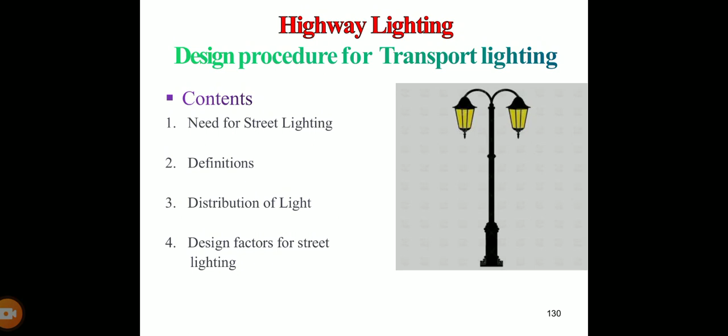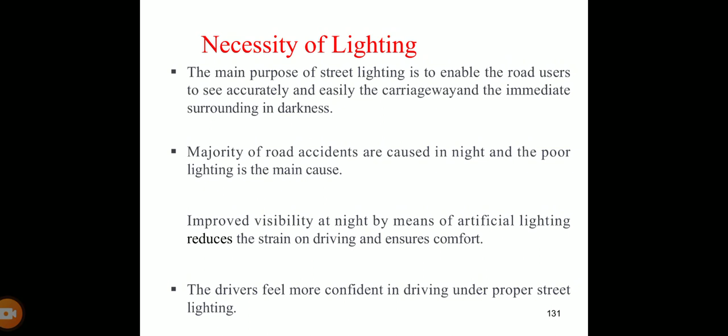Right? So, it is necessary to provide it at intersections, bridge sites, level crossings, and in places where restrictions to traffic movement are there. The driver feels more comfortable driving under proper street lighting. Improved visibility at night by means of artificial lighting should be provided in order to reduce the strain on driving and ensure comfort.

With better lighting, the speed of the traffic generally improves and traffic flow conditions also improve. Lighting on rural roads has not yet become common, evidently due to cost considerations and fewer pedestrians and other slow traffic using the facilities at night. But on the contrary, on urban roads where the density of population is very high, road lighting has other advantages like a feeling of security and protection.

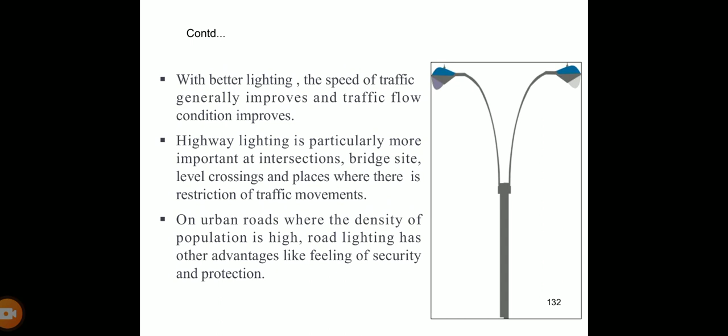Thus, even though headlights of vehicles may be sufficient for safe night driving, road lighting may still be considered as an additional facility for road users. This is a very important principle. Then there are several factors which influence night visibility. Among them is the amount and distribution of light flux from the lamps. It is going to vary, and ultimately it is going to hamper the lighting facility.

The size of the object, brightness of the object, brightness of the background, reflecting characteristics of the pavement surface, glare on the eye of the driver, and time available to see an object are some of the factors which will influence night visibility.

Then there are some terms that we'll study in detail. Luminous flux: this is the radiant power given by the light source. Its SI unit is lumen. Then what is lumen? It is indicated by lm. It is equal to the amount of flux received on a surface area of 1 square meter of a sphere when a light source of one candela power is placed at its center.

Means how much light it is going to give is nothing but a lumen. Lumen is the SI unit of luminous flux. Lumen is calculated by candle power into the angle at which it is going to throw the light. Steradian: a steradian is the unit of solid angle. It is equal to the solid angle subtended at the center of the sphere by unit area of its surface. You simply remember these terms.

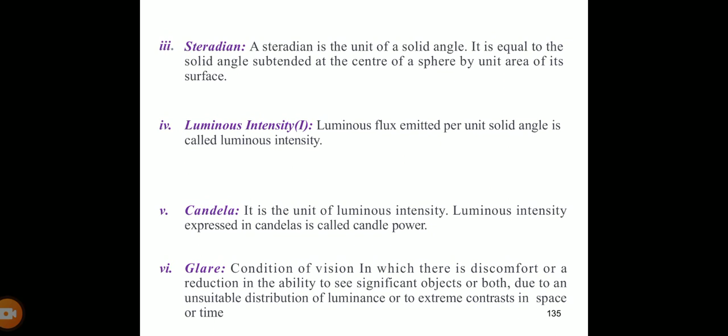Then luminous intensity: the luminous flux emitted per unit solid angle is called the luminous intensity. Then candela: it is the unit of luminous intensity. Luminous intensity expressed in candelas is called candle power. Glare: we have already learned this in detail, but we'll still simply overlook it. A condition of vision in which there is discomfort, or a reduction in the ability to see the significant object, or both, due to an unsuitable distribution of luminance or to extreme contrast in space or time, is called glare.

Then lantern: a housing for one or more lamps comprising a body and reflector, diffuser, or enclosure associated with the lamps is called a lantern. Then illumination: it is the measure of the amount of light flux which falls on the surface. We see the lights are on and off. How do we say on? If it is throwing light, then we say it is on. That is nothing but illumination.

So its formula is E equals Lm into Cu into LMF upon S into W. Its unit is lux or lumens per square meter. Now what do these terms indicate?

Here Lm is equal to lamp lumens, Cu is coefficient of utilization, Lmf is lamp maintenance factor, this is given in the IS codes. S is spacing between the luminaires and W is the width of the street or roadway in meters.

Now next important term we have luminance or brightness. The luminous intensity emitted or reflected per unit area of the surface is called luminance. Whatever is the intensity of the emitted light per unit area is called as luminance or brightness.

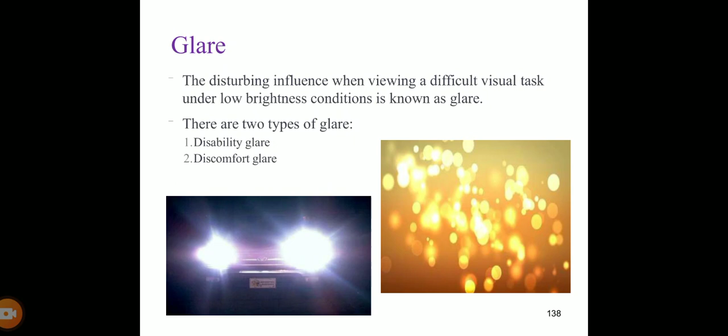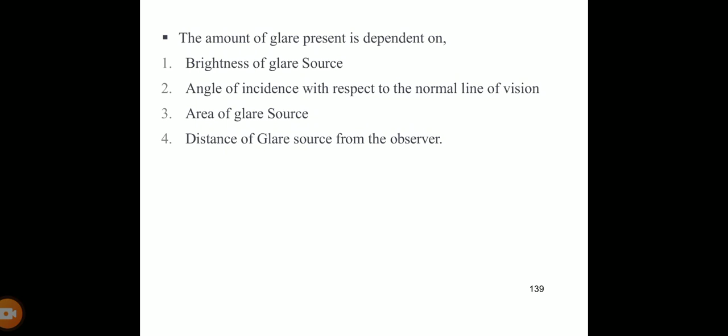The amount of glare present depends upon the brightness of the glare source, angle of incidence with respect to the normal line of vision, area of glare source, and distance of glare source from the observer.

Now lamps. In one or the other use, we have seen all these types of lamps, either used for household purposes or for commercial uses. The lamps commonly used for highway lighting are mercury vapor lamps, sodium vapor lamps, fluorescent lamps, and tungsten filament lamps.

Then luminary distribution of light. How exactly does the distribution of light take place? To have the best utility of the luminaire or the source of light, it is necessary to have proper distribution of light. It should be aimed to achieve the following purposes. It should cover the pavement between the kerbs, right? If you're going to lamp a light, whatever the curb area is, it should cover that.

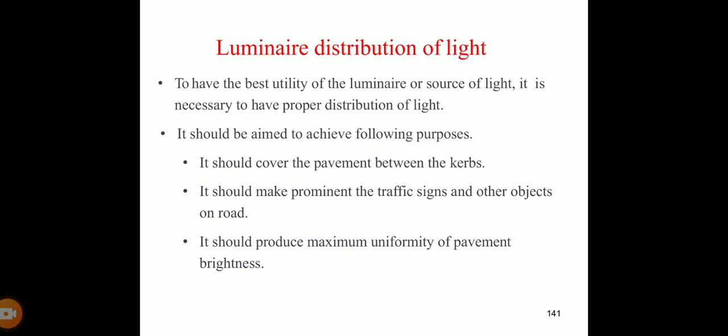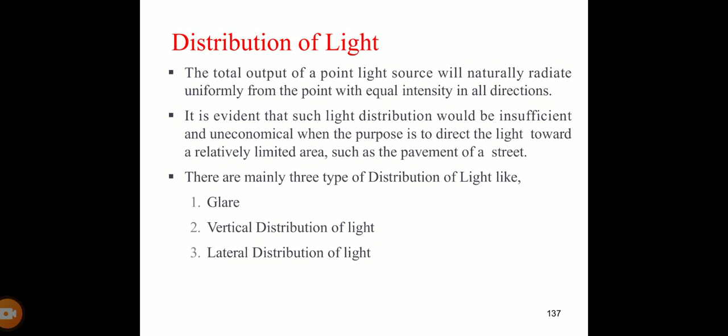It should make prominent the traffic signs and other objects on the road. Whatever light you focus should clearly show the traffic signals or signboards provided. It should produce maximum uniformity of the pavement brightness. As we said, distribution of light takes place in three ways, that is glare, vertical distribution and lateral distribution.

So next we have the horizontal distribution or horizontal aiming. When two floodlights are mounted to a single pole, then horizontal aiming also must be considered. Each floodlight should be vertically aimed according to the two-third rule. The floodlights should be aimed up to 90 degrees apart.

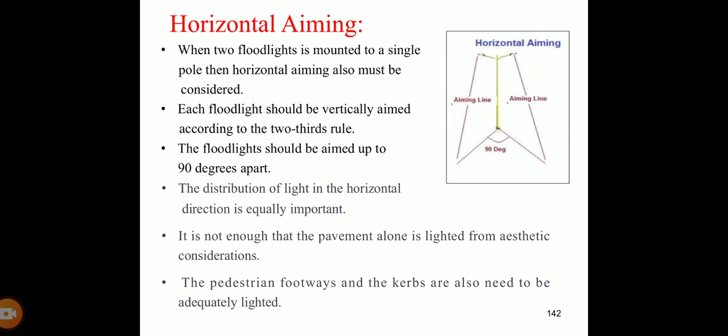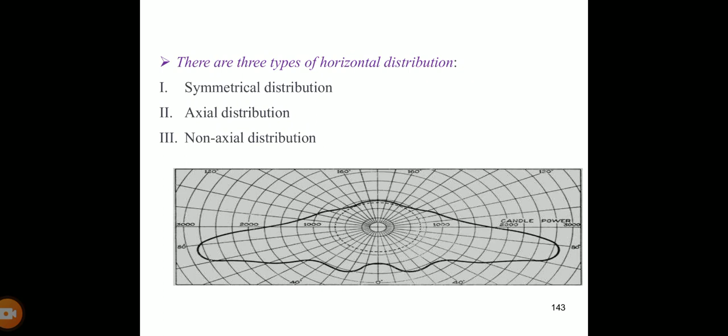The distribution of light in the horizontal direction is equally important. It is not enough that the pavement alone is lighted from aesthetic consideration. The pedestrian footpaths and the curbs also need to be adequately lighted. Again, this horizontal distribution can be further divided into symmetrical distribution, axial distribution, and non-axial distribution.

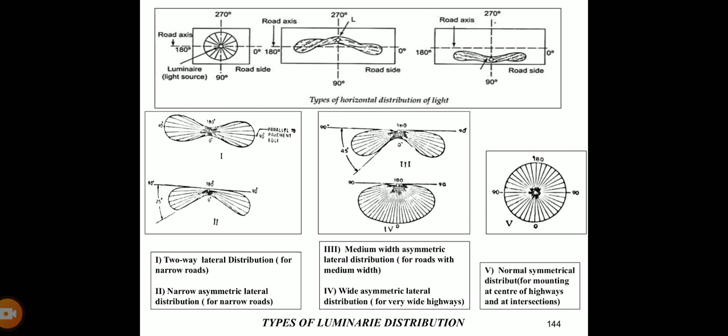So figure number 4 covers more area, whereas fifth, normal symmetrical distribution, is for mounting at the center of the highways and at intersections. See, generally at intersections we see that the entire circle is covered by these lights, hence this type of mounting should be done. Figure number 5. So depending upon the type of requirement of the light, this luminaire distribution is followed and the lamps are installed.

Now the third type is vertical aiming or vertical distribution of the lights. The vertical distribution of light in a street light system follows one of three types: cutoff. In the cutoff system, the light is reduced as completely and as rapidly as possible above about a 70-degree angle with the downward vertical. The main beam is usually provided at this angle. This system eliminates the glare. In vertical aiming, whatever the lamp will be, it will be focused at an angle of 70 degrees. Then it will cover a widespread area.

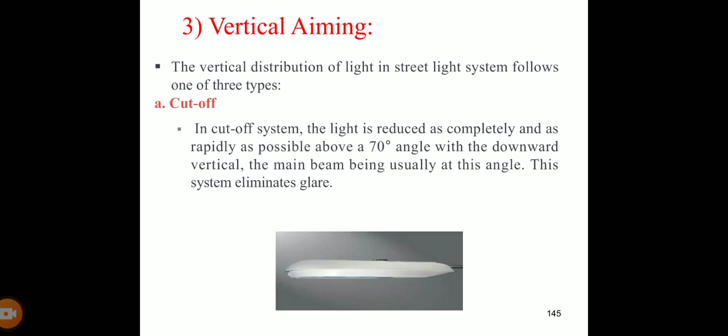The non-cutoff high angle beam. In the non-cutoff high angle beam system, the peak intensity is at about 80 degrees and there is considerable output near the horizontal plane. With this system, a certain amount of glare is inevitable and modern lighting practice does not favor this system. Hence, this system is not widely in use. And the third one, semi-cutoff, that is medium angle beam. This system is in between the above two systems, with a peak intensity directed at an angle of 75 degrees.

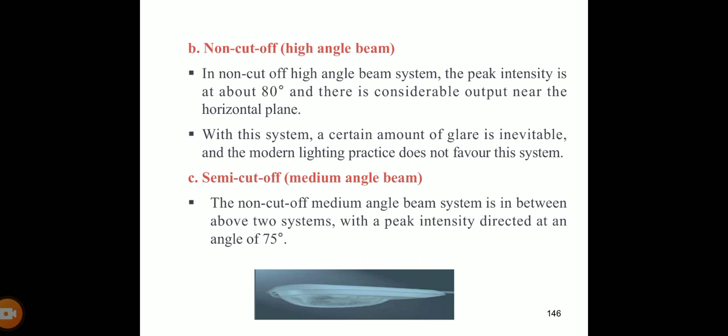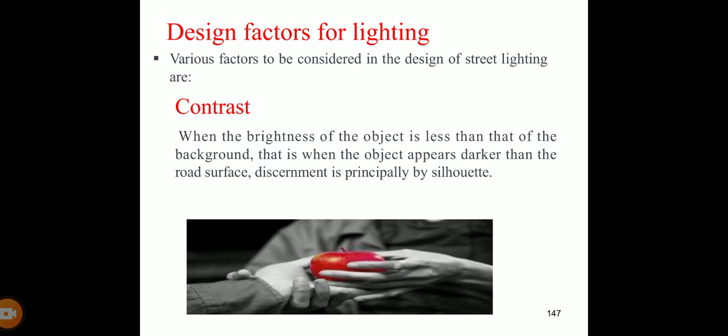Now there are some design factors for lighting, like contrast. When the brightness of the object is less than that of the background, the object appears darker than the road surface. Discernment is principally by silhouette. Height and overhang of mounting. The glare on the eyes from the mounted lights decreases with increasing height of the mounting. This is an important factor. The light will not directly affect your eye by increasing the height of the lighting. By increasing the height, the widespread area will also go on increasing. Usually mounting height ranges from 6 meters to 10 meters.

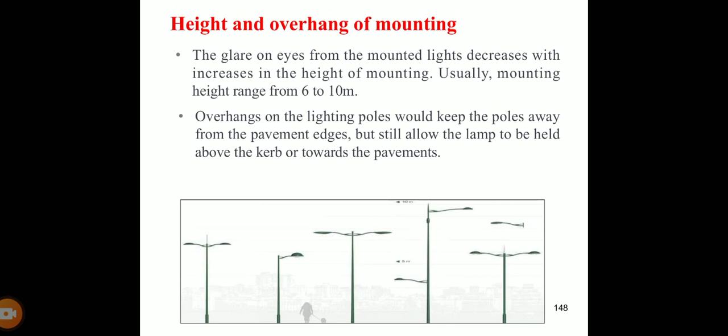Once you pass along the road in urban areas, you see various types of lighting provided along the streets. Overhangs on the lighting poles keep the poles away from the pavement edges but still allow the lamp to be held above the curb or towards the pavement. So here again some figures show various types of lighting facilities. The lighting pole should not be installed very close to the pavement edge because in that case the capacity of the roadway is affected and the free movement of traffic is obstructed. So there should be proper spacing provided between the lighting. We'll study it in detail.

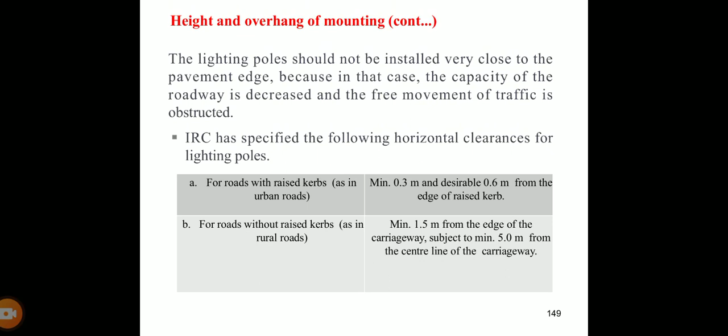As per IRC, the horizontal clearance for the lighting pole for roads with raised curbs should be minimum 0.3 meter to 0.6 meter from the edges of the raised curb. And for roads without raised curbs, that is, curbs are provided along the road itself, not raised by providing certain height or islands, the minimum is 1.5 meter from the edge of the carriageway, subject to 5 meter from the center line of the carriageway. These are the specifications by IRC.

Overhanging should also be avoided, and proper location of the lamp should be done in order to counteract the shadow problem. Now again, in vertical aiming, the fixture should be aimed to two-thirds of the distance across the area to be lighted, and at least a 30-degree angle should be provided below horizontal.

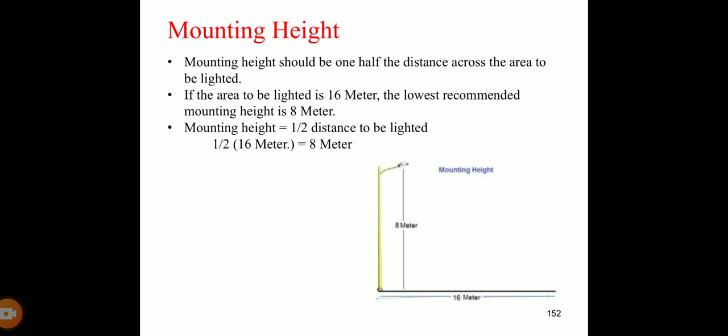Then mounting height. Mounting height should be one half the distance across the area to be lighted. If the area to be lighted is 16 meter, the lowest recommended mounting height is 8 meter. Mounting height is half the distance to be lighted. Whatever area you want to cover, the height should be simply half, or we can say height should be equal to half the distance to be lighted.

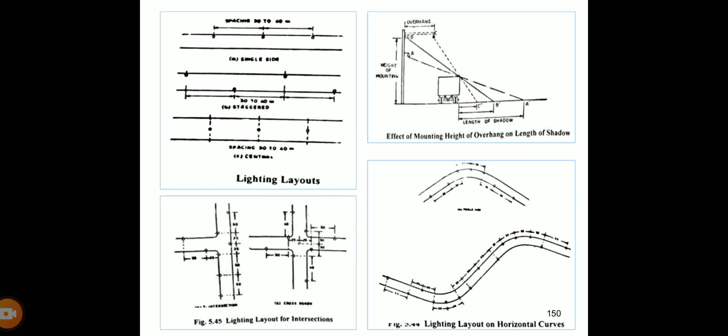Then spacing. The spacing between lamps on straight roads is about 3 to 5 times the mounting height. How much should it be? 3 to 5 times the height. For sharp curves, the spacing between the lamps will go on reducing, or they will be as close as possible for better visibility conditions. Okay, so this fourth figure is showing you the lighting facilities on the curve. Now see, the spacing between the lamps is decreasing, whereas for simply straight roads, the spacing should be around 3 to 5 times the mounting height.

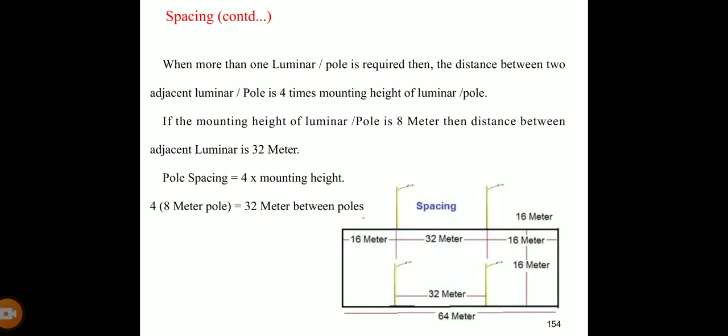When more than one luminaire per pole is required, then the distance between two adjacent luminaires is 4 times the mounting height of the luminaires. If the mounting height of the luminaire is 8 meter, then the distance between adjacent luminaires is 32 meter, 8 into 4. Then pole spacing should be 4 into mounting height.

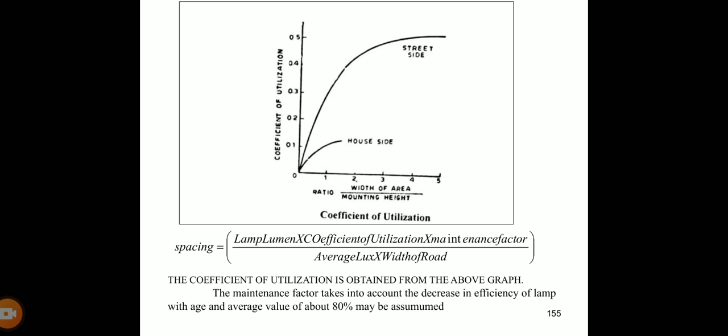Now this is the graph showing the spacing. Spacing is lamp lumen into coefficient of utilization into maintenance factor upon average lux into width of the road. Then what is the coefficient of utilization? It is obtained from the ratio of width of area upon mounting height, from this above figure. The maintenance factor takes into account the decrease in efficiency of the lamp with age. An average value of about 80% can be assumed.

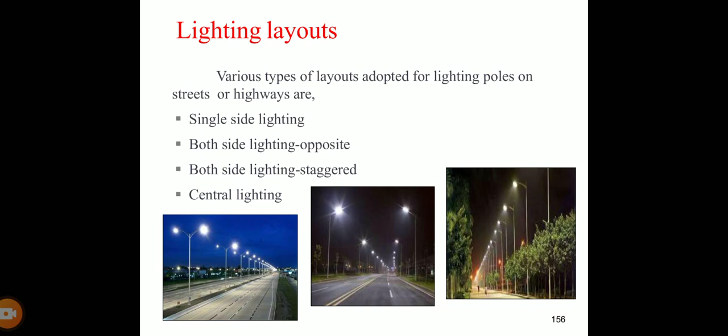Then lighting layout. When you move along the streets, you might have seen lighting facilities provided like this. These are the layouts adopted for lighting poles on streets or highways. This can be a single-sided lighting system, where only one-sided lighting is provided. See these figures. Whereas there is the both-side lamp system, figure number 1, both-side lighting staggered, and the central lighting system, again the first figure.

Then what are the benefits of this lighting? Due to proper street lighting, the police can patrol better during the night, and their job becomes easier and more manageable. Architects and town planners have found lighting to be a major source of beautification for their projects. Business in cities or towns increases during the night, which could otherwise be totally deserted. Due to good street lighting, there is a considerable reduction in accidents during the night. Illegal actions and antisocial activities on the roads are discouraged by improved lighting techniques, and it gives a pleasant atmosphere during the night hours.

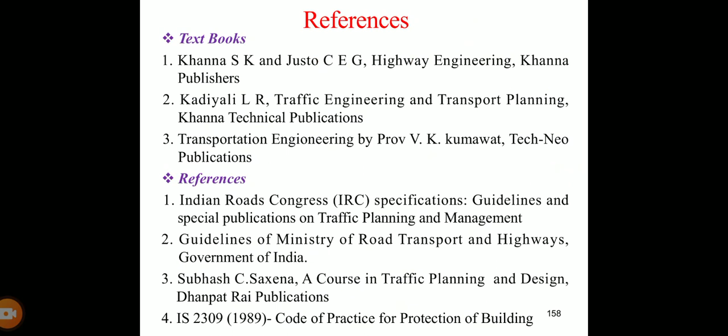So with this, we have completed our entire syllabus of unit number 3. I have referred to some textbooks for this. Kindly refer to the Justo and Khanna book of highway engineering. The entire syllabus is given in very neat, simple language. Kindly refer to it; it is a proper reference book.